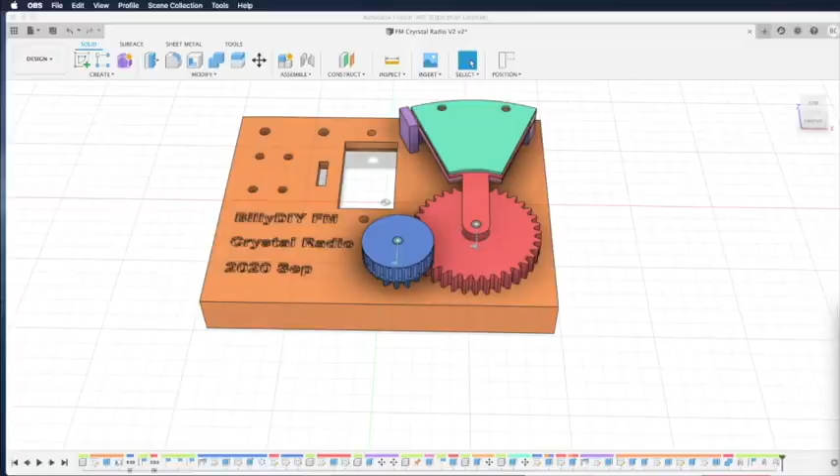This is part 3 of the 4-part video to create and design the Fusion 360 design for FM crystal radio. On part 3, we'll finish the last bit that is about drilling holes into the baseboard and also laying out the parts on the surface so it will be readily printed.

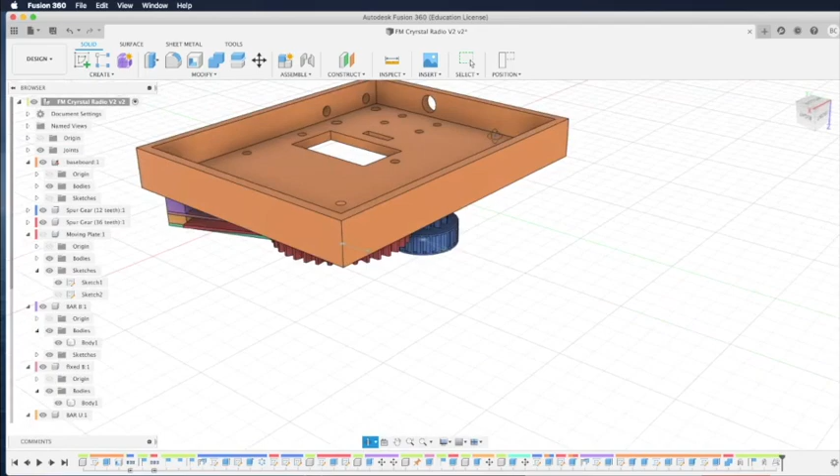Without further ado, let's complete part 3. Part 3 includes drilling holes on the board, engraving your name and dates on the board, gear animation to see how the variable capacitor works, and layout for printing, putting all the parts on surface with the right orientation so it can be printed.

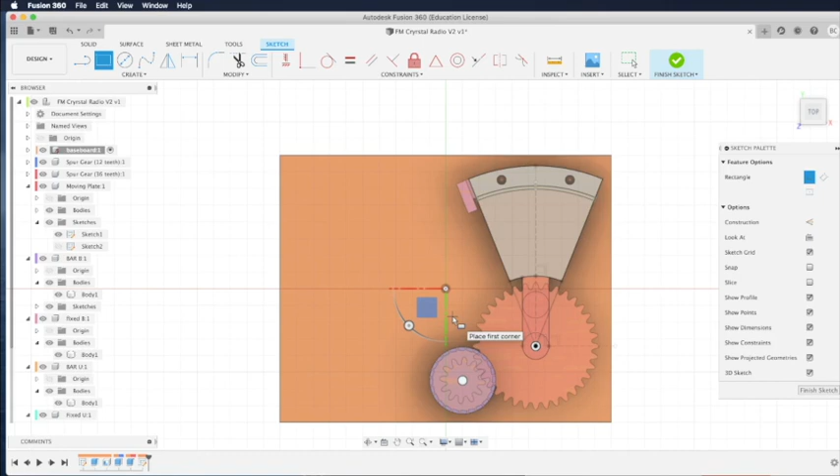We need to draw a rectangle to create a hole just below the coil so we will not impact the Q factor of the coil being too close to the baseboard. So we use the rectangle command in the sketch to draw a rectangle. Next, we need to draw a line in the middle of the rectangle. When you hit the middle, you will see the triangle, and it will show you that it's the middle.

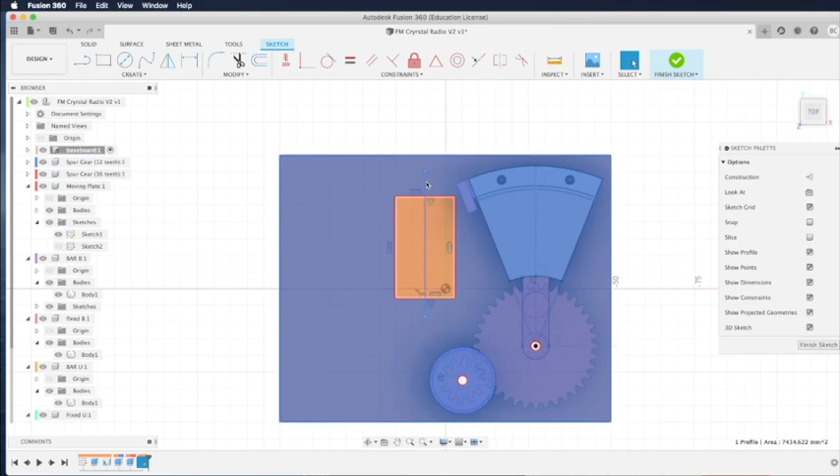Then we right-click, turn it into a construction line, and then we'll pick a point where we want to have our hole drilled, where the legs of the coil will pass through. So we right-click on there, type the command C to create a circle. Then we need to draw a horizontal line for reference at the middle of the rectangle. And then again right-click and turn it into a construction line.

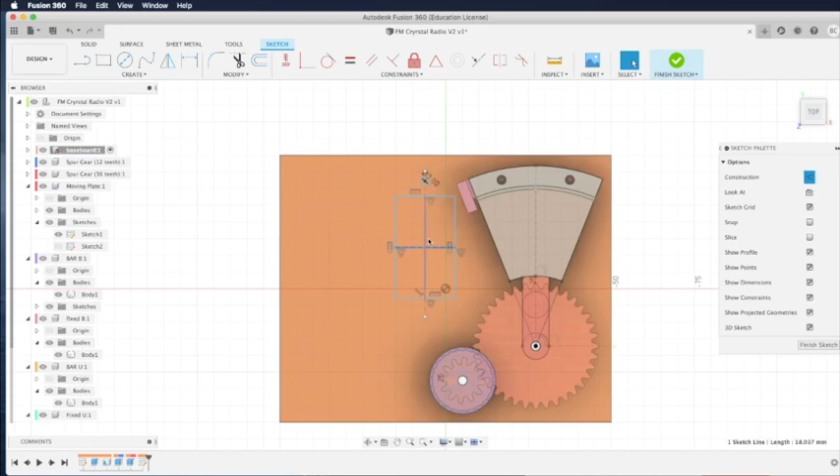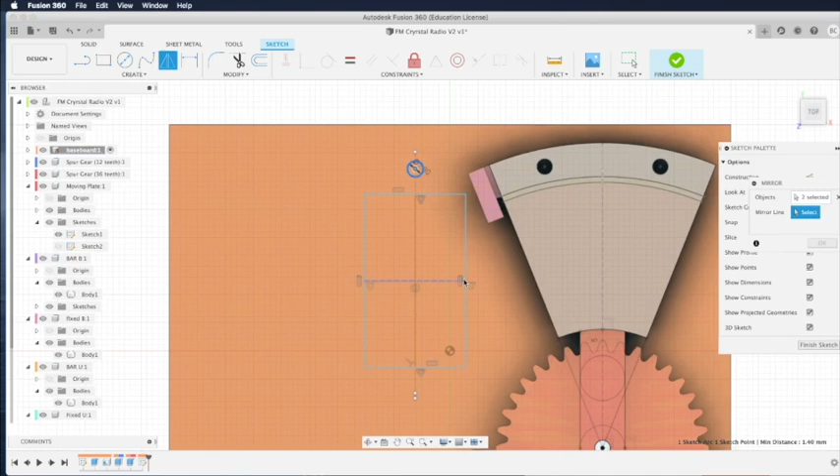Next, press the S key. We'll bring up the sketch menu and type mirror to select the mirror command. Then we need to select the circle to be mirrored, both the middle point and the circumference of the circle, and then select the mirror line, which is the horizontal line we just drew, then click OK. You find the circle on the top is copied down to the bottom, to maintain symmetry.

We are going to extend the horizontal construction line further to the edge of the box. Just draw a line there and right-click, select normal/construction to turn it into a construction line. Press S key to bring up the sketch menu and then type in rectangle and select center rectangle. Because we're going to use it, we can click on the arrow to add it to our menu and click the center rectangle icon.

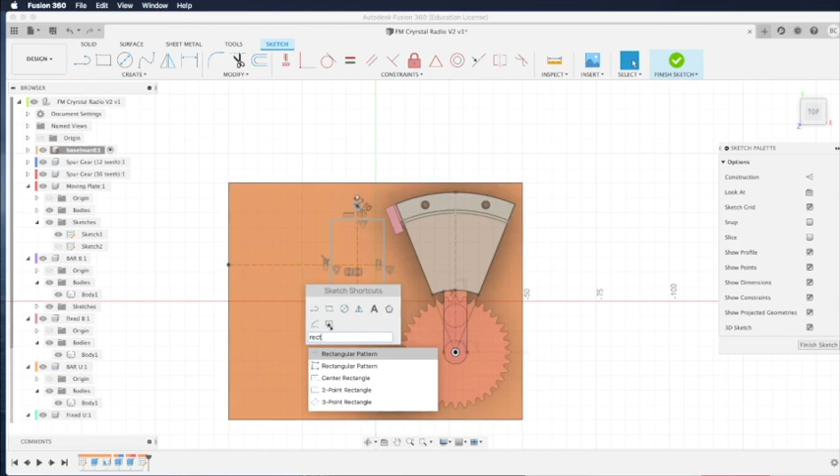The nice thing about center rectangle is when you find the center of the line, fix the center of the rectangle there and then drag it, it will give you a rectangle centered on your line. We're going to create this for a 4-pin socket, where we will plug in the diode crystal or MOSFET. The size will be 11 millimeter times 2.9 millimeter.

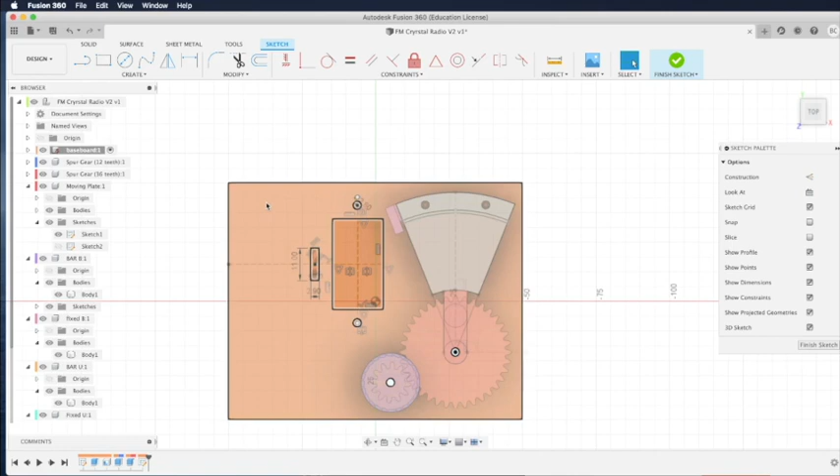If you don't like the position, you can highlight all the sketch and then just move it. Because we are using reference lines, anything you move, all the other sketch patterns will move at the same time. This is the nice thing about Fusion 360. They will align and move together in one group. Then you can move the dimension text to the right place so it won't block the other patterns.

Next, we're going to drill a few more holes for the fixed capacitor, the one that will smooth out the audio, remove the high frequency. It's a high frequency filter. So let's pick a point, click the C command, the circle command, pick a point at the center of the circle, drag it to 2.8 millimeter diameter.

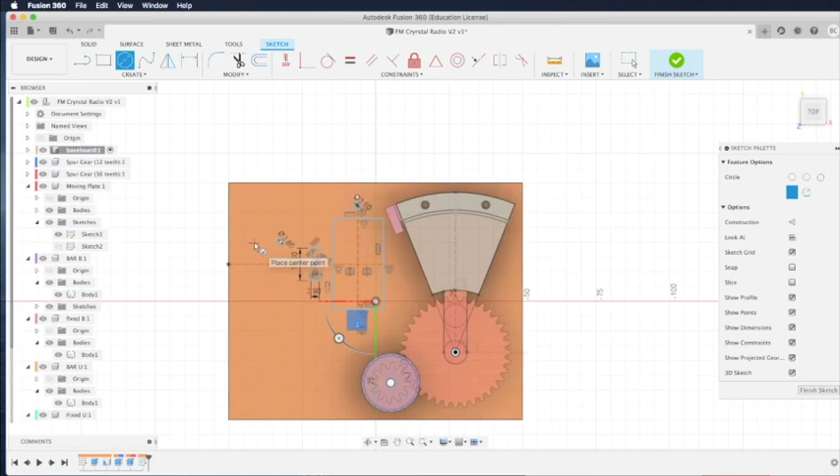And then we can draw a second circle which will be used to hook up to the bare wire headphones. If you want bare wire headphones instead of a headphone jack, you can drill this hole here to mount the M3 screw where you can connect your headphone jack, headphone line, the bare wire line.

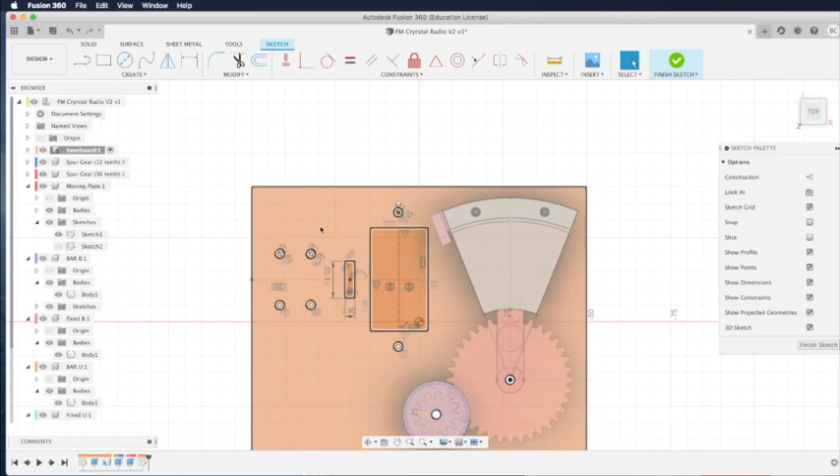Okay, so again we are going to use the mirror function. Highlight both circles, click S, select the mirror, which is the double triangle, and then select the middle line, and okay, you get the symmetry and replicate it to the two holes down below. So now we've got 4 holes drilled, the coil, 2 holes on the coil, and then the socket for the MOSFET and diode.

So now we need to drill a few more holes for the antenna. So let's pick the hole, draw a horizontal line, turn it into a construction line. Let's draw 2 more vertical construction lines so the holes can align with the other holes already there. The second one I'll align with the socket. And then we turn the 2 lines into construction line, right click, normal construction.

Then at the cross section of these 3 lines, we can draw our circle and drill the holes for our antennas. The antenna is an M4 screw, so we'll draw the holes of 3.5 millimeter. So 2 circles are drawn. Now we have all the pattern we have. The next thing is to actually drill the holes.

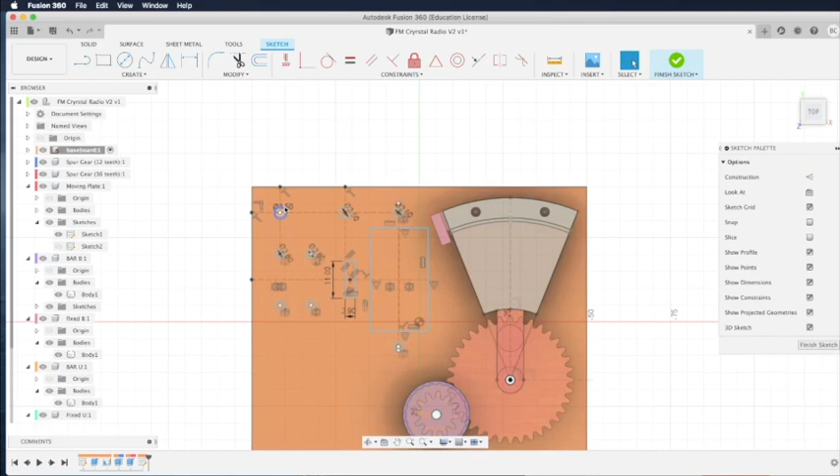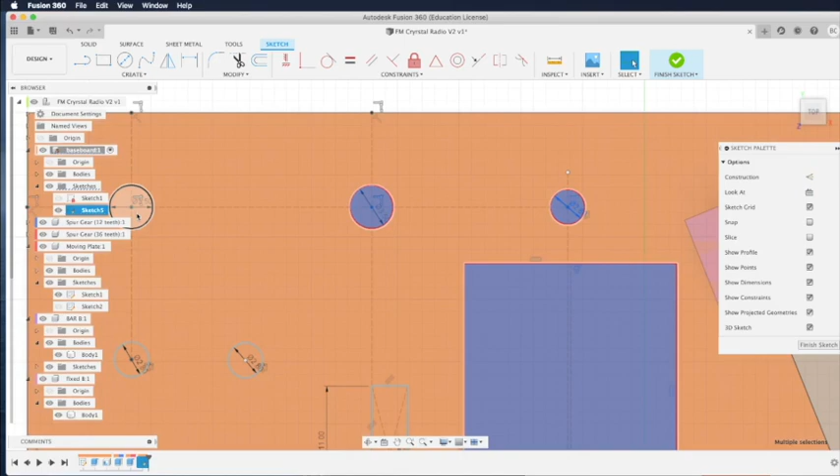To do that, we hold the Shift key and then use the left mouse button, click and select all the holes we want to drill. You notice that you have to click on a part that is not an edge. So between the center and the edge, there's all the white space there. Once you click on that, that part will be selected. Sometimes you have to enlarge your drawing to find that spot.

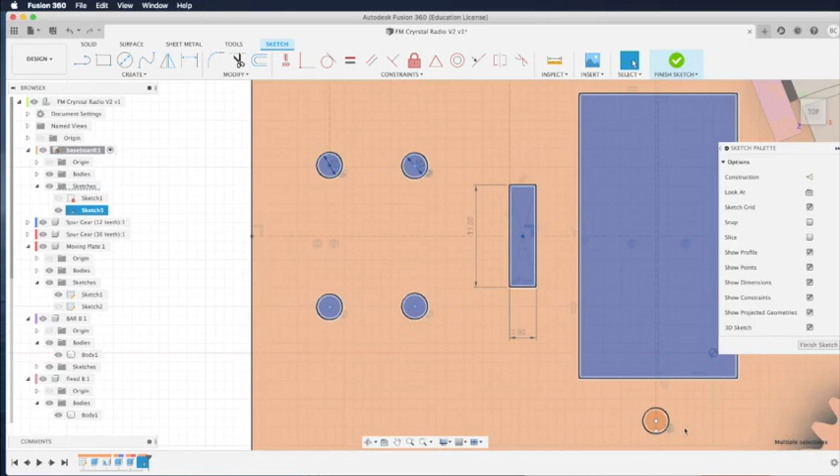It's a bit difficult for circle because you've got a center there blocking your click. Enlarge it and you'll be fine. And one more circle to go. Okay. So all the patterns have been selected and we can start drilling the holes by right-clicking and select the press pull.

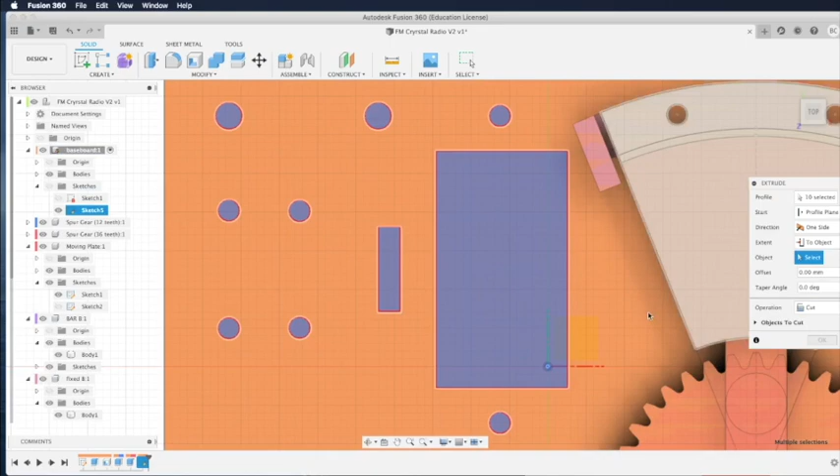On extent, we select to object and then select to cut. And then we flip the wheel to the bottom. And then we select the bottom of the baseboard. So the holes will cut through to the bottom of the baseboard, like that. Click OK, and the holes are drilled.

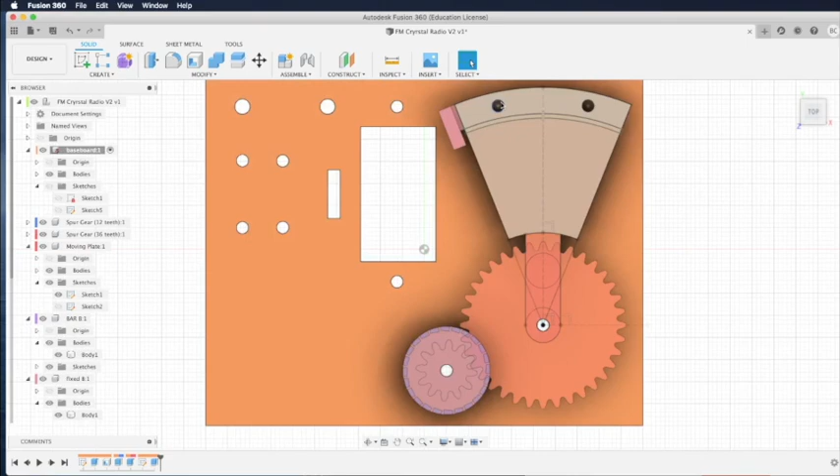We can examine it if there are still holes that are not drilled down to the bottom, like these 2 holes on the fixed plate. You see they are not white, that means they haven't been drilled through. Then it's easy, you just highlight them, hold the Shift key and highlight the second one, and then right click, press pull.

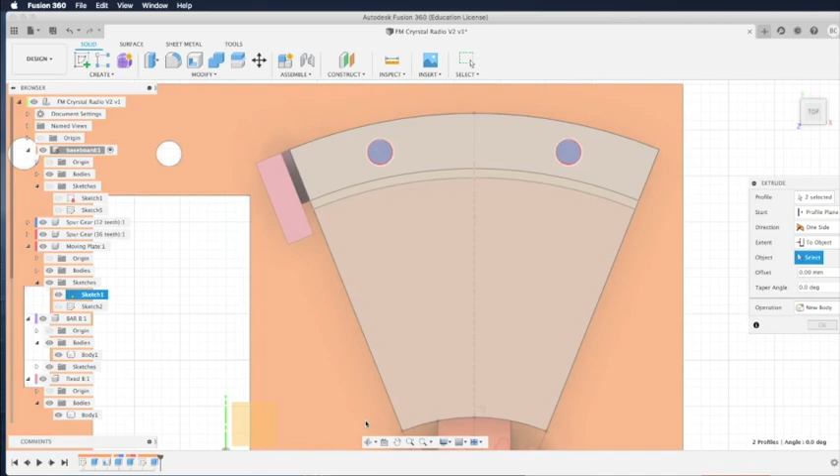Get the menu up and then do the same thing. Distance to object and then select the back of the baseboard and select cut. And then you will cut through and have the holes you need.

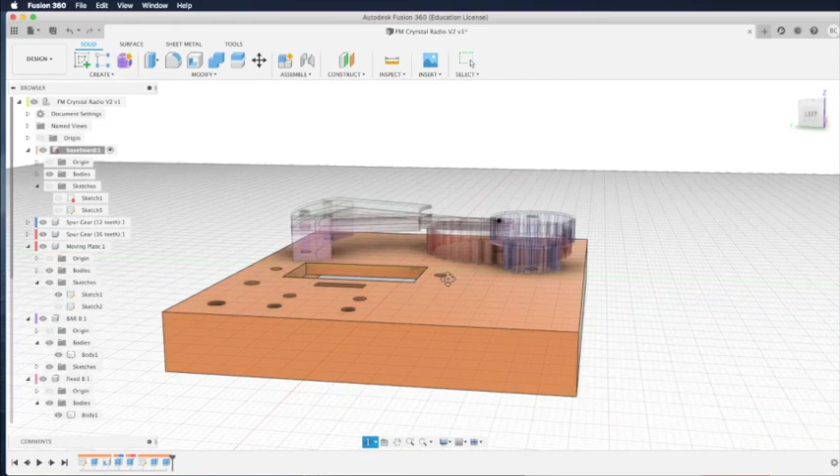Next, we need to drill the holes on the side of the box of the baseboard. So let's turn the wheel to the side. Click on the surface on the side and then click the Sketch Align command on the top.

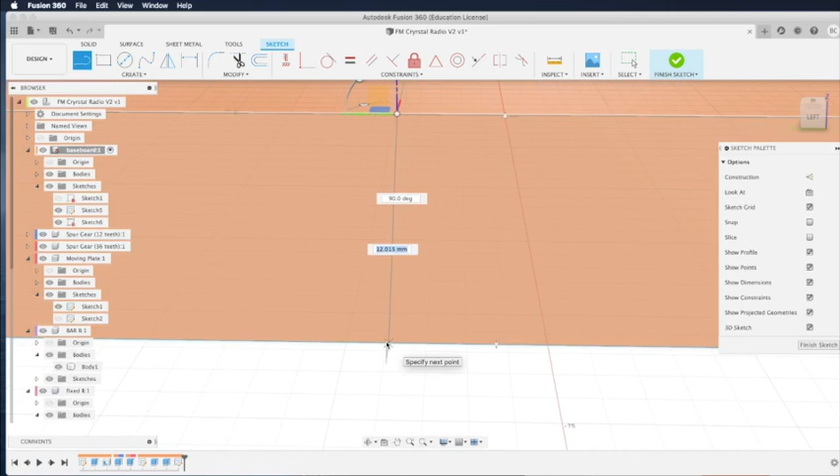To better align the headphone jack to the two screw holes on the surface, let's draw a line from the center of one of the holes down to the side and make that a construction line. Repeat that for the second hole there. Let's draw a line from the center there and make it a construction line.

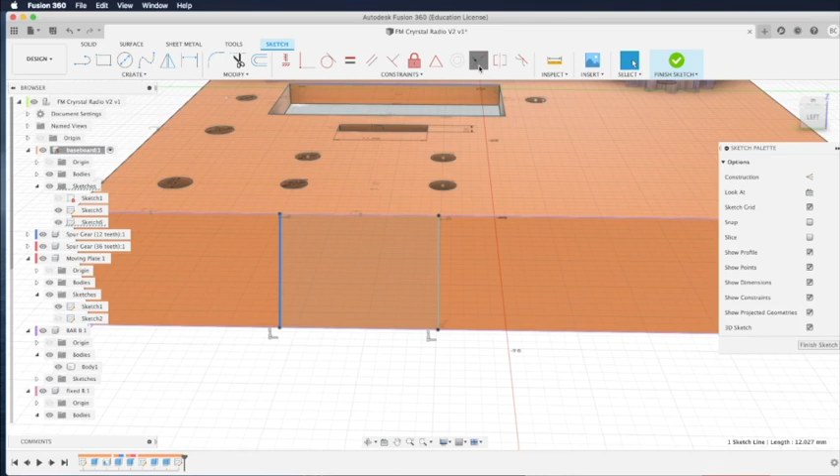To make sure the two lines are perpendicular to the base of the board, we can use the constraint here. I use the perpendicular constraint to mark the line with the bottom of the baseboard so it becomes perpendicular. Then continue to use the line command and move my mouse to where I see the triangle. Triangle means middle of the line. I draw the line there from the middle of the two vertical lines.

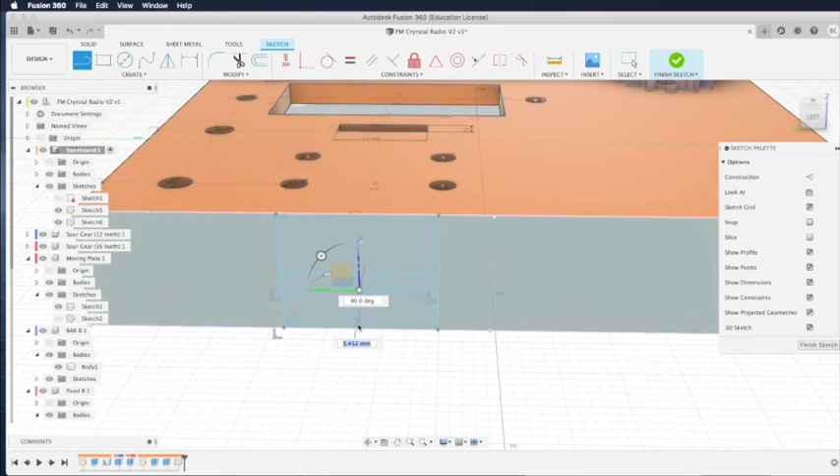So this is the good point to place our headphone jack. But it may be a bit too high, so I draw a second line and make that parallel with the first line. Then I draw a vertical line at the midpoint of that second horizontal line. Drag it all the way to the bottom.

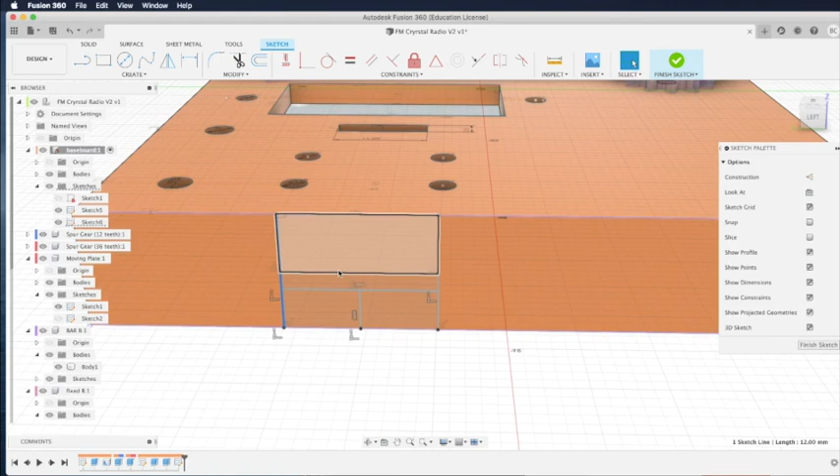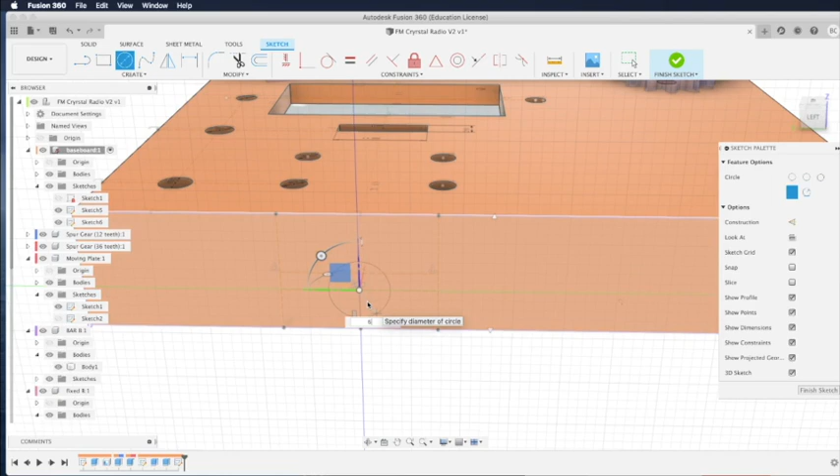To turn them all into construction lines, I highlight all of them and right-click and select Normal Construction. Then I pick the middle of the second line to draw a circle, which will be my headphone jack. This is 6 mm for a headphone jack. Then I right-click on the circle, press pull to drill the hole.

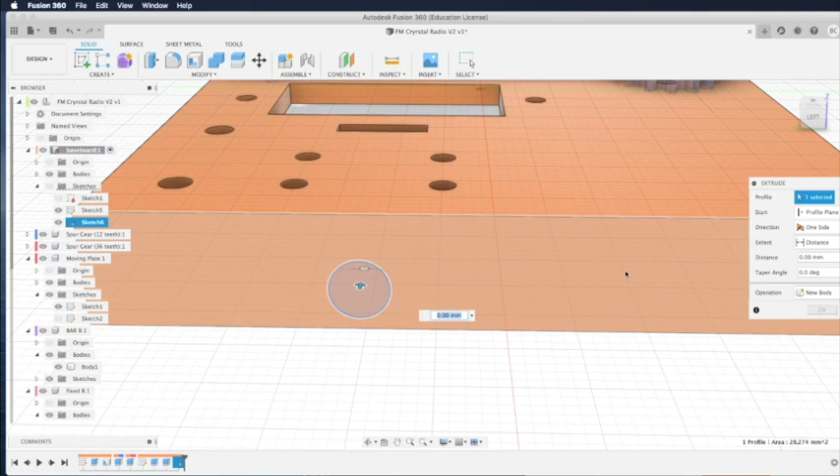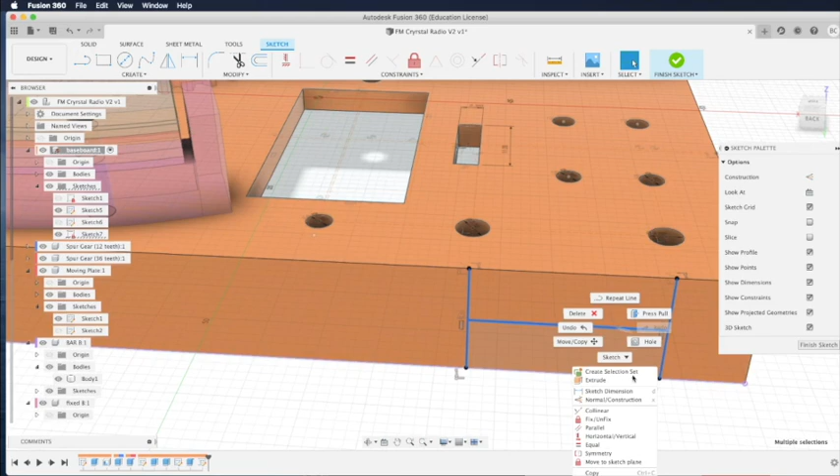The last two holes we need to drill are on the other side, so let's flip it. So we need these two holes to be the antenna holes aligned with the two M4 antenna holes on the top. So repeating what we did for the headphone jack. Just draw two vertical construction lines and a horizontal construction line at the middle of these two lines. Then we can type the C key to draw two 3.5 mm circles and then cut the holes we need.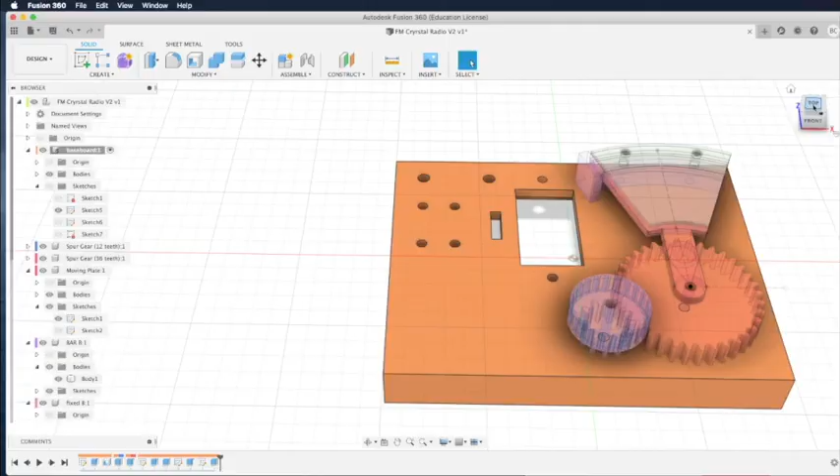This step is optional. If you want to engrave your name or date on the creation, then you can do this. Select the surface of the baseboard, type the S key to bring up the sketch menu, click on the letter A for text, and then pick the spot where you want to engrave the word. Flip the word upside down.

I don't know how they design the software. It's always upside down, right? They may have to fix it.

But type in the text you want to engrave, and then select the height. 5 mm is the right size, otherwise it will be too big. You also need to select the fonts. We will need to select it to be Arial Black, otherwise it will be too thin and you won't notice it after printing. You may need multiple lines because one line may not be long enough.

So the second line goes the same way, flip it 180 degrees, upside down, type in the text. Change to 5 mm first, type in the text. And Arial Black, and OK. So I need the third line now for the dates, so let's repeat it.

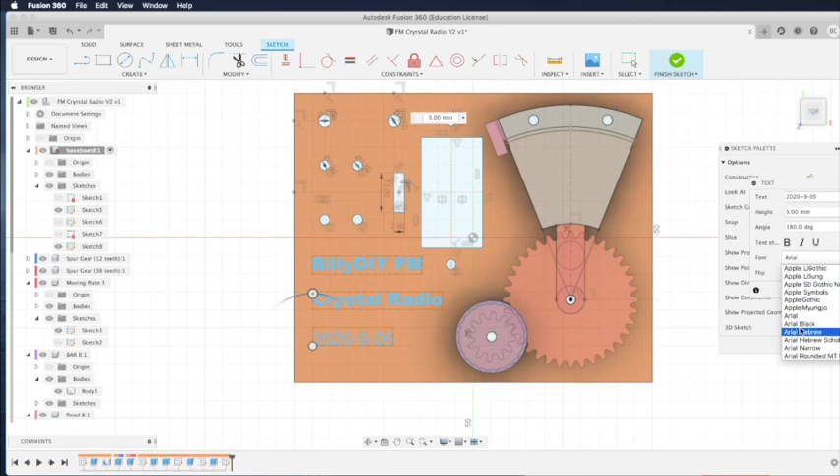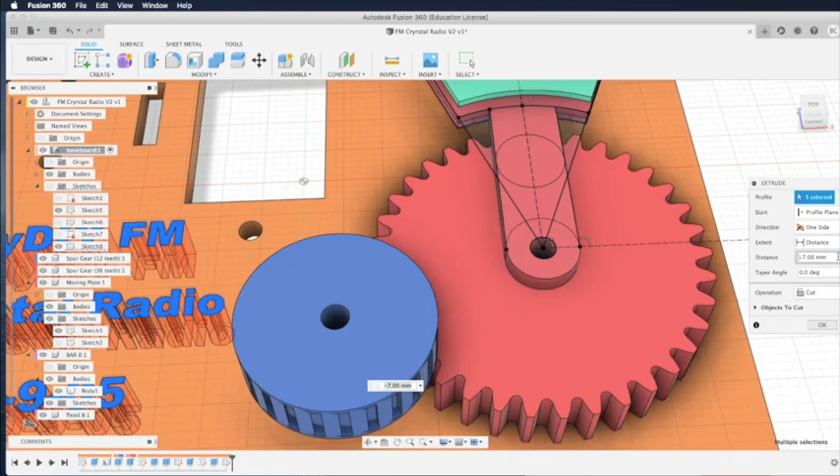This step will just give you the symbol on the screen. It won't actually engrave into the board. To engrave it, highlight all 3 lines of text, right-click, press pull, and then select the depth of the engraving, how deep you want to cut through the wood. Minus 0.5 will be too light, minus 1 will be better. So minus 1 mm down, cut down into the wood, select cut and OK.

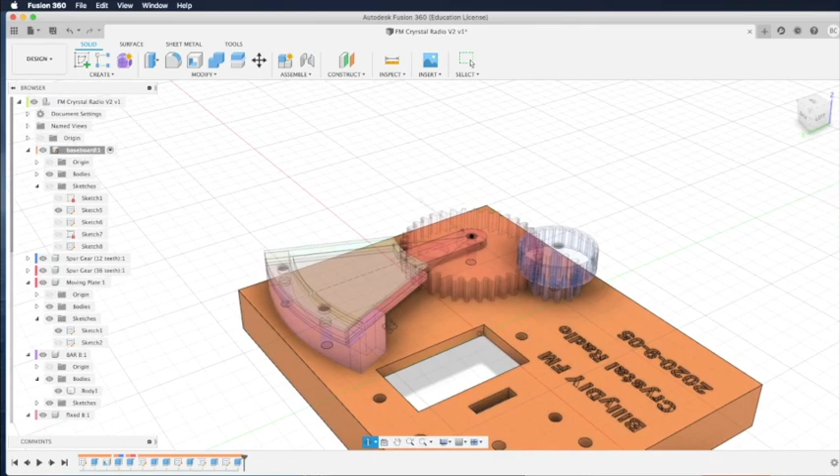That's it. There you have it. This is finished. The entire FM crystal radio design.